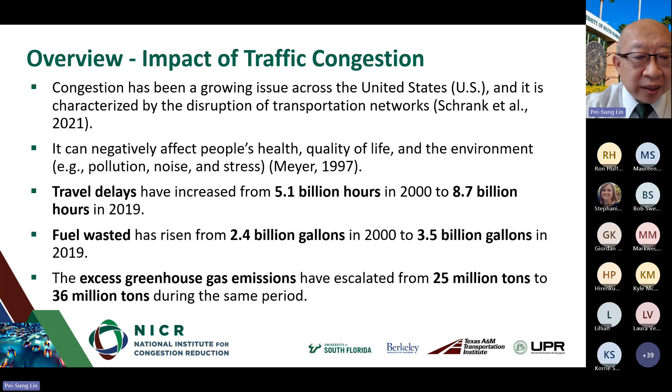And the impact in terms of the money wasted on traffic congestion, as you can see, from year 2000 to 2019, is really significant, from $77 billion to $190 billion. It not only affects individuals every day, but also affects things like trucking congestion. The truck congestion is also a very large number.

And during COVID-19, on one hand, we got the impact of COVID-19, but we saw a reduction in congestion. Everybody was wondering whether it would come back after COVID-19. But apparently, everybody experienced it again after COVID-19, and it bounced back. I think at this point, it's almost the same as before COVID, and it continues to pose a significant impact to our everyday life.

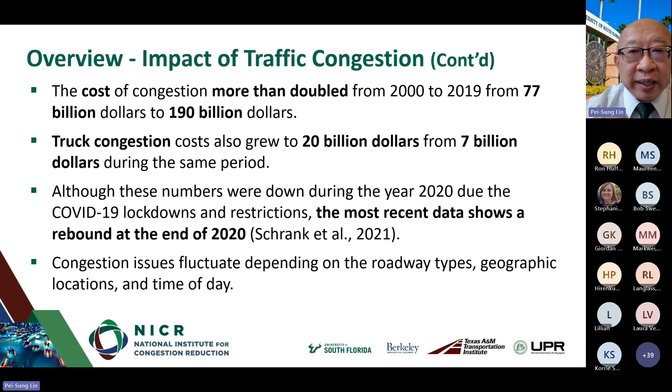If you're looking into traffic congestion, we all know there's recurring congestion and non-recurring congestion. Recurring congestion is such as a bottleneck or caused by poor signal timing, but non-recurring congestion is caused by incidents, crashes, work zones, special events, and also severe weather conditions.

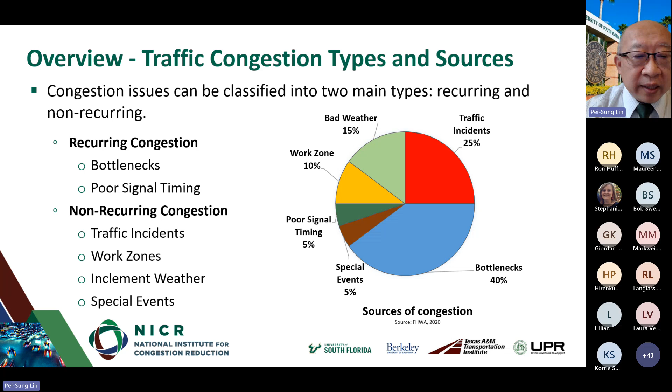So generally, how do we deal with the recurring congestion? How do we deal with the non-recurring congestion? These are always the ones we're facing, and how to address them - we're going to talk more about that later.

What's the motivation to work on this particular research project, and why a congestion reduction roadmap? In the past, when we have congestion, a lot of time we focus on how to address that, and we look into particular problems, and particular solutions, strategies, countermeasures.

But it's important that we need to be able to look at all potential causes, all potential congestion sources, and all different congestion mitigation areas and strategies. That mitigation area or strategy, I kind of refer to very similarly here - but how do we look at them together?

If you only focus on one item - but actually congestion, as we know, is a very complicated situation, and there are multiple factors that all contribute to that. So that's what motivates us to look into all these different

mitigation areas together, all these related strategies together, and also look at it time-wise from short term, mid-term to long term, and also look into different sizes of metro areas, because different metro areas experience different congestion scenarios. So it's not that one good strategy may be very good for one type of small urban city or urban area, but that doesn't mean it will work very effectively for a large urban area.

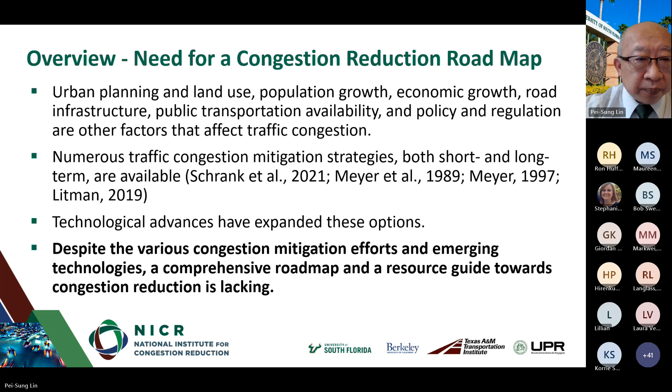So the project objective here, very importantly, is we want to understand all the causes and effective solution strategies to address congestion. And here we look into 12 major areas I'm going to show you very shortly.

We looked through the literature review into these 12 different areas. These are the areas we all think should be very effective strategy mitigation areas for congestion. So we want to look individually at all these 12 areas and also see if any areas can work together.

Literature review is one approach. Very importantly is talking to practitioners, the experts in these areas. So we also took this opportunity to talk to experts in each of these 12 areas to see what their experience is, what the challenges are, what the solutions and strategies are, and how other areas can work together with this particular emphasis area.

And to see how we can put them together to address traffic congestion. So eventually, based on this finding, we want to develop a comprehensive roadmap to help reduce traffic congestion and provide the state DOT, local DOT, MPO with a vision and steps toward how to utilize this information and resources to reduce traffic congestion.

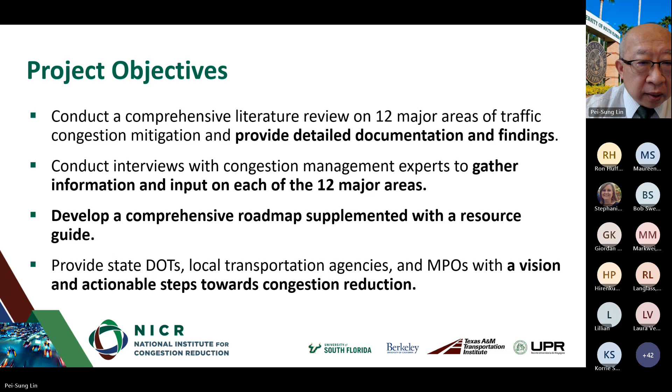We also add on generally the construction aspect - a lot of the time we know road construction is expensive, but at certain times it's also very necessary. And the other one, the last one here, so 12 plus 2 - one is construction, and the other is land use policy, because during the interviews there were a couple of experts who also particularly emphasized land use, because that definitely will also affect things beyond just the traditional way to address congestion.

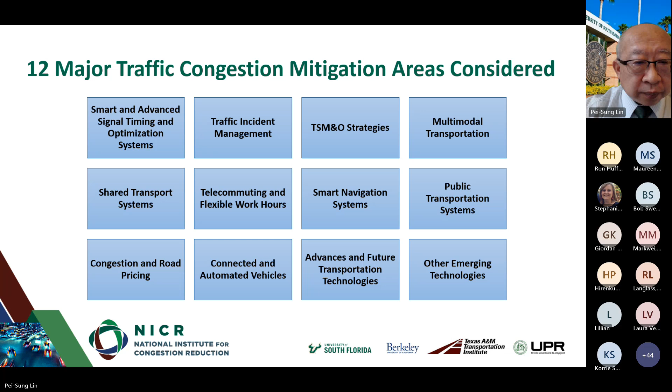So I will briefly go through these, and most of you, when you see this strategy or mitigation area, you'll understand what that means. Later on I'll also share the takeaway from the literature review and expert interviews. The first one is smart and advanced signal timing and optimization systems. A lot of you have been working in this area for quite some time, and we all recognize the importance of traffic signal timing, traffic signal systems, or even adaptive traffic signal control. So this is one mitigation area or strategy we focus on.

The second one is traffic incident management. With non-recurrent congestion, especially crashes involving a vehicle or vulnerable road users, that can cause really serious congestion. Traffic incident management is about how to effectively manage traffic incidents when they occur, and that also could include special events, work zones, or weather conditions. So this is a broad coverage on how to effectively manage incidents.

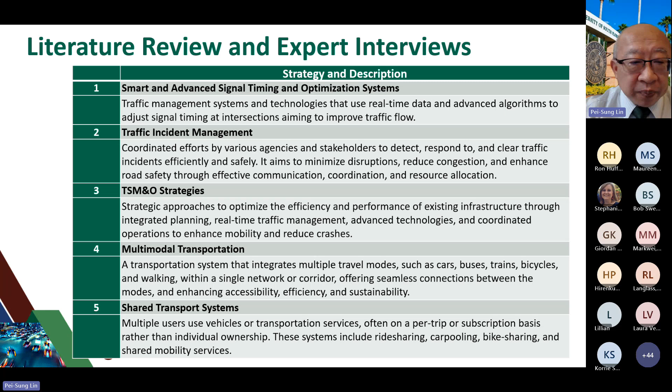The next one is telecommuting and flexible work hours. During COVID-19, most of us probably experienced working at home most of the time, and a lot of trips were reduced on the roadway. We clearly saw the difference in demand on the road. So this is another important area of traffic demand management.

The next one is a smart navigation system. Most of us have experience using navigation in our vehicles, and sometimes even before you start your trip, you look at the congestion map to see where the congestion is and how you can better plan your trip to reach your destination. So this is another area we also look into.

Number 8 here is the public transportation system, which is very important, especially if your city is large. Imagine those vehicles taking the subway, light rail, or buses - imagine if they all drove their cars on the road instead, that would make a very big difference. So public transportation is a very important area we also cover.

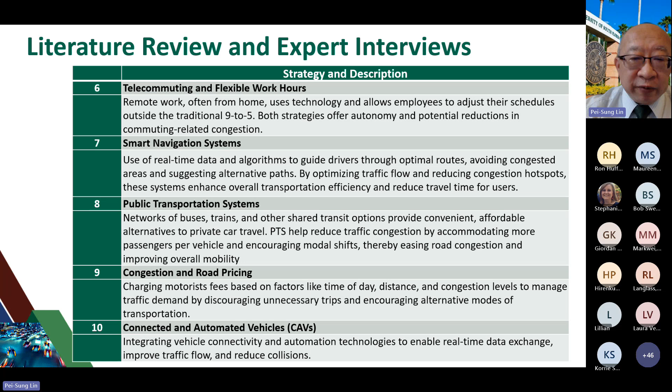And this is also one area we focus on: connected and automated vehicles. We know there's a lot of research in this area, and it can really make a big difference. But at this time, because market penetration is relatively very low right now, we don't see immediate benefit. But this is coming. The age of autonomous vehicles and connected vehicles is coming, so they will make a big difference in the future.

And the next one is advanced and future transportation technologies, like CAV and eVTOL, the electric vertical takeoff and landing vehicles, and hyperloop. There's a lot of flying car technology. So there's a lot of future technology, but some of them already have a really good foundation to move forward. This is also one area, especially on technology and future innovation, that we look into.

And there's other emerging technology. We talk about advanced and emerging, and a lot of times it's kind of close - some of it's advanced, but you can also treat it as emerging. I know the eVTOL has gotten a lot of popularity lately, so we also cover that.

And the last two are what I just mentioned: new roadway construction and capacity expansion. This one is particularly necessary, and definitely one of the congestion reduction strategies. And finally, we also have land use and innovative transportation policy programs. During our interviews, we found this is also an important topic to look into, so we included it here.

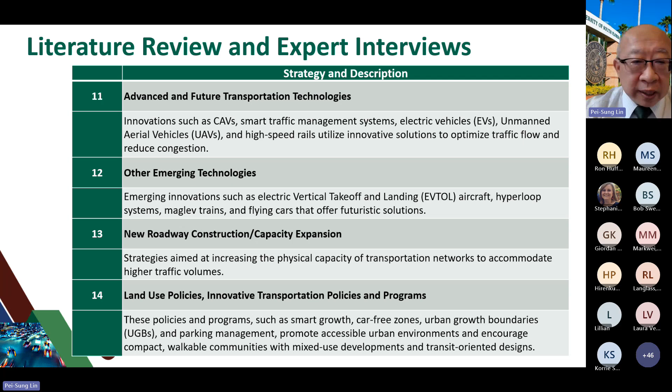So in our literature review and expert interviews, there are 12 key areas we look into. For each congestion mitigation area, on the bullet points, we look at the definition, the particular mitigation strategy or area and its sub-areas, the congestion reduction strategy, under what conditions it can make a big difference, and what approach to take. We also look into current and future technology, benefits, limitations, and uncertainty on particular strategies, and the interaction between mitigation areas - how these 12 or 14 areas can interact together to maybe integrate or combine to address traffic congestion.

We did similar work during our interviews, talking to 39 experts nationwide, covering these 12 congestion mitigation areas. We coordinated with them, scheduled meetings, and discussed topics, which allowed us to answer different questions besides the ones I just listed.

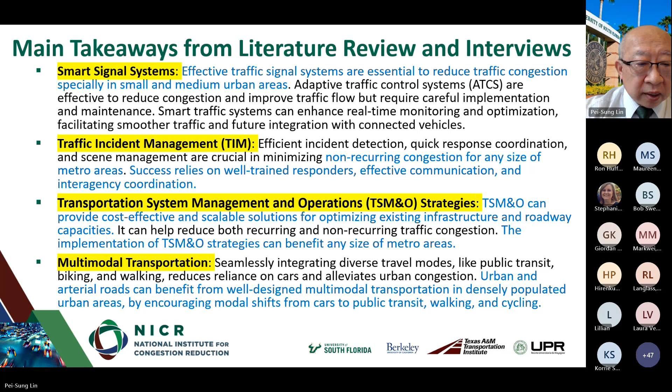And the shared transportation system, this is also another area. Somebody says maybe one day most people will all use the shared transportation system. So we'll wait and see, because especially the young generation, some people in large urban areas, don't even have vehicles. And also in large cities, a lot of times parking is expensive, and it's inconvenient to drive in the congested area. So shared transportation becomes more and more popular.

And the next one is telecommuting and flexible work hours. This is really an area we already saw during COVID-19. And I know after COVID-19, a lot of the working environment has changed. If an employer can provide flexible work hours or telecommuting, or mix them, it should make a big difference on the demand on the road.

And the next one, the smart navigation system. We know real-time information really can make differences. So an effective way is to have more people use a navigation system and also plan their trip ahead of time, and that can also make differences.

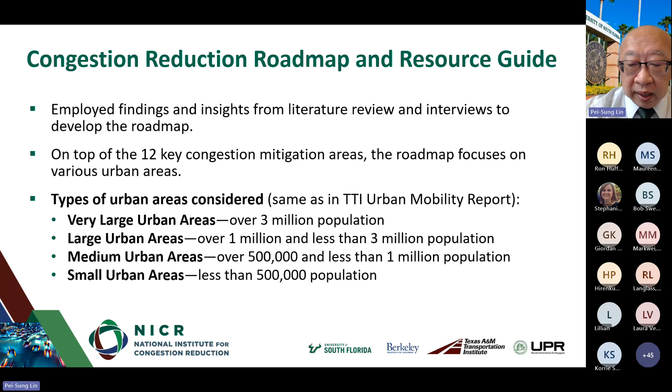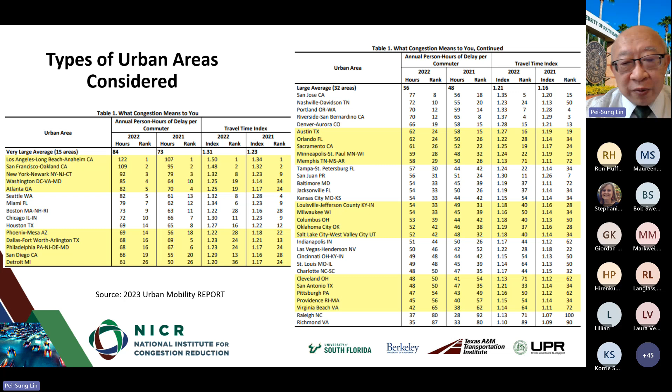And as you can see here, this is the type of urban area, and I use the 2023 Urban Mobility Report. So you may be able to see your cities in these different areas, so you can recognize whether your city is very large, large, medium or small. Yeah, so this covers a lot of metropolitan areas in the United States.

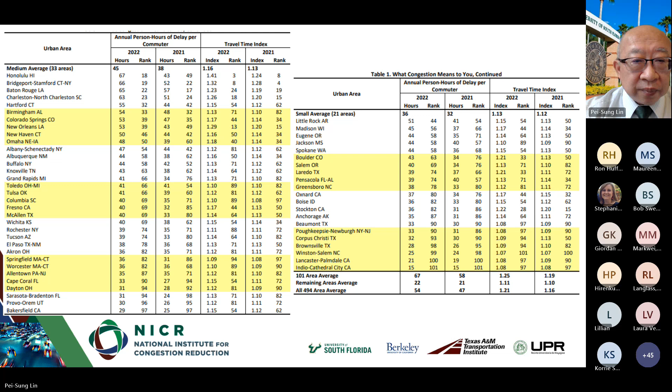And so for the congestion roadmap, here I just briefly lay out the characteristics of the very large urban area, large urban areas, medium size and small size. And as we live in these areas, you can tell the differences. The very large one here is very densely populated,

hosting all the major economic centers, culture hubs, with a diverse community and industry, and also a comprehensive infrastructure, and there are a lot of examples, the ones we show in the major metropolitan areas. So imagine those cities, you have a good idea about that.

And they likely have a really good metro or subway or light rail combination and transit buses. They have major airports, seaports, and rail terminals with a lot of combinations. And so this is one example here.

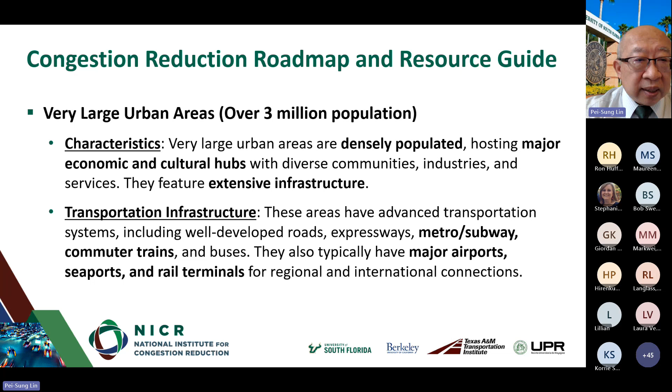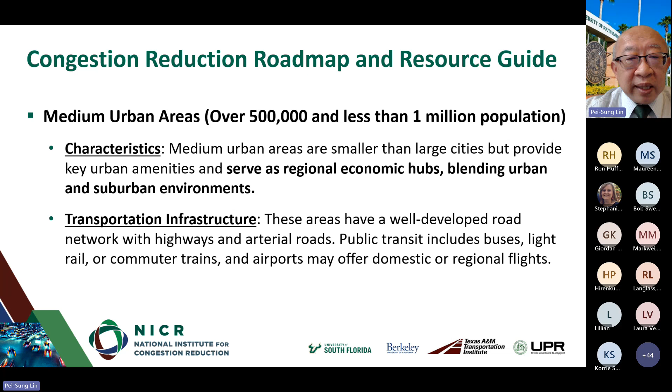And the same, we have the large metropolitan area, over a million but less than 3 million population. And the medium-sized urban area, over 500,000 population but less than a million. And the smaller one is less than 500,000. So here we listed the 12 congestion mitigation strategies.

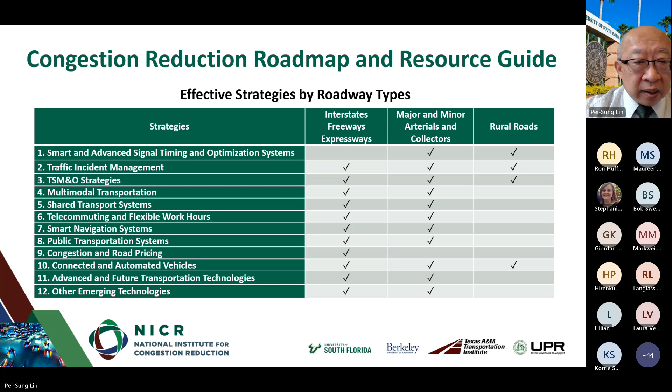So if your agency is in a very large metropolitan area, this could be an area you can focus more on, because when more people are able to use public transportation in different modes, train, transit buses, light rail, subway, anything, you start to remove a lot of traffic from the road. And that still can make big differences.

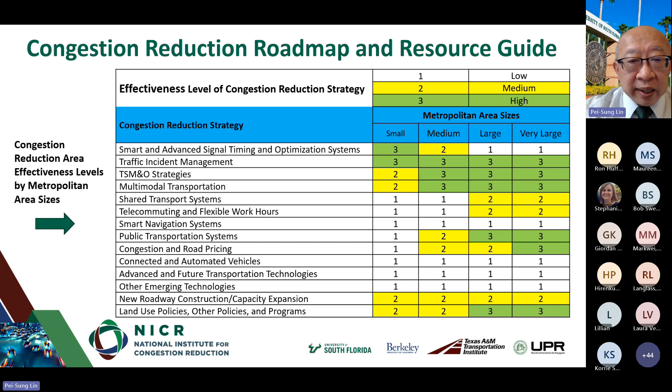And so back here, some of you may say, oh, there's a lot of others with one, like a lot of CAV technology, and the reason is because right now some of them you cannot see immediately. Some of the technology will be here, or you have already seen a very small portion on the market. But at this moment, we cannot really see the reduction of traffic congestion right away. So here we put one. However, let's go to the next slide.

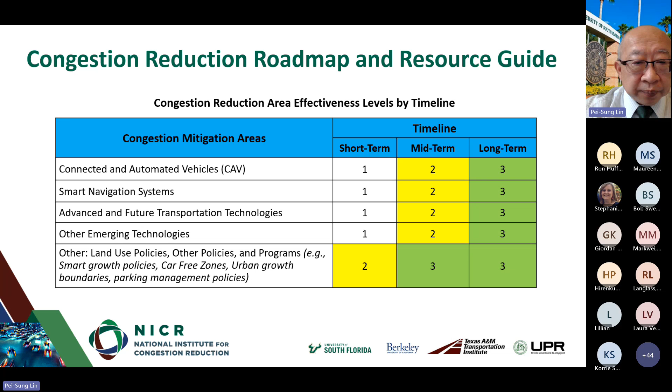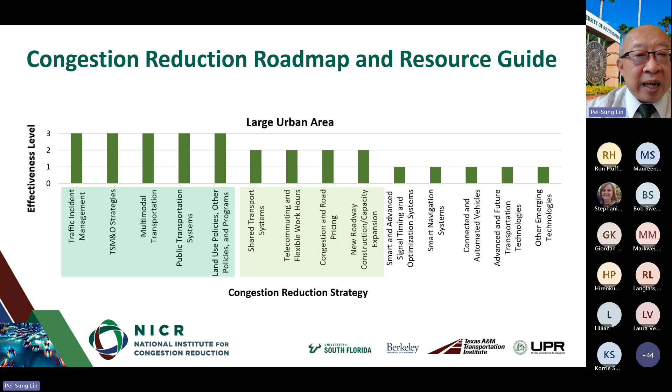But you just don't see a big reduction because there's a lot of traffic out there, and a lot of roadways already exceed the capacity. So in that way, you may not be able to see a big difference, for example, on the signal timing system.

And so for the very large metropolitan area, you can see this is the list of the important strategies besides what we just said. So the TSMO strategy applies to everybody, traffic incident management, multimodal transportation, public transportation system, and sometimes congestion pricing is really necessary, and also land use, better design, better planning for the city. This is all very, very important.

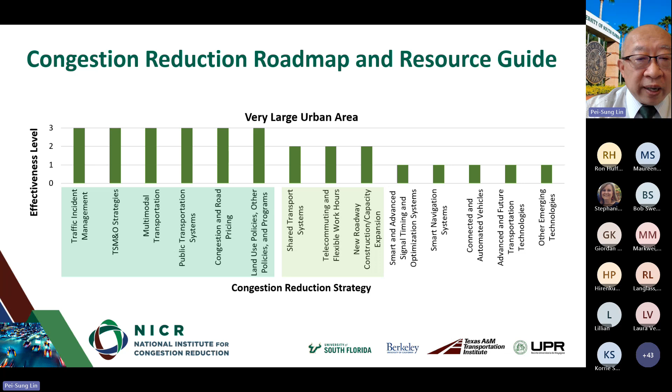And so here we also have a congestion reduction roadmap, which basically shows you the relationship: when you work on one strategy or one mitigation area, how you can work with others as well. For example, when you have a public transportation system, you should think about multimodal transportation. How about shared transportation? To be successful, these all need to work together.

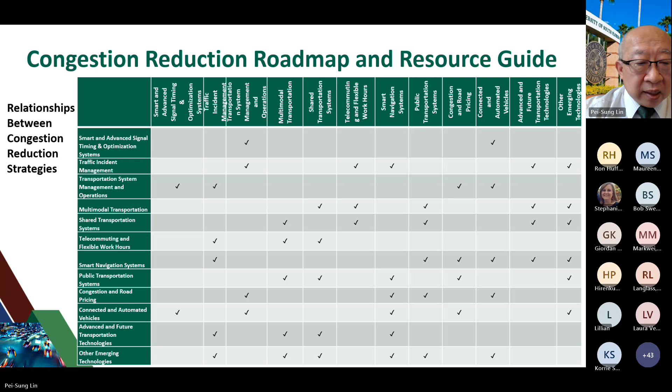And so the key steps for doing that, and I think this is the purpose of the study here: first, you identify the challenge. I know you're all familiar with the congestion problem generally in your city, and what's the solution. But when you look into a solution, here we try to show you different strategies that can potentially mitigate your congestion problem based on your urban size.

So look into not just one strategy, but multiple strategies, and also think about what's the most effective, what's of medium effectiveness, and think about which ones can apply to your city and work together. And the second one is

leverage the best practice. In the next couple of slides, I will show you some examples, some successes, because this study also goes into the success cases. We also have the list there, so that's a resource for you. When you look at the picture together, not just one particular area, but all these 12, 14 areas, then look into similar-size cities and see what successful examples are out there. Maybe some of them can apply to you.

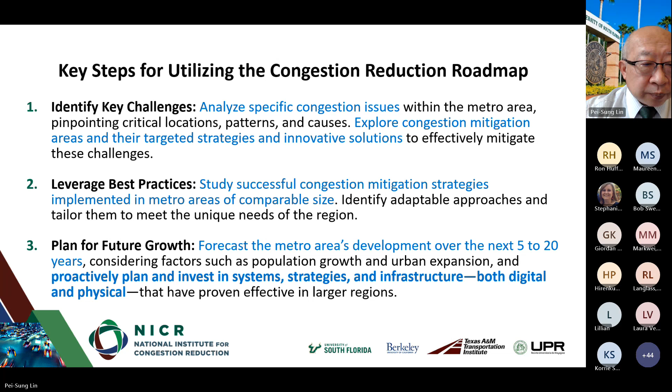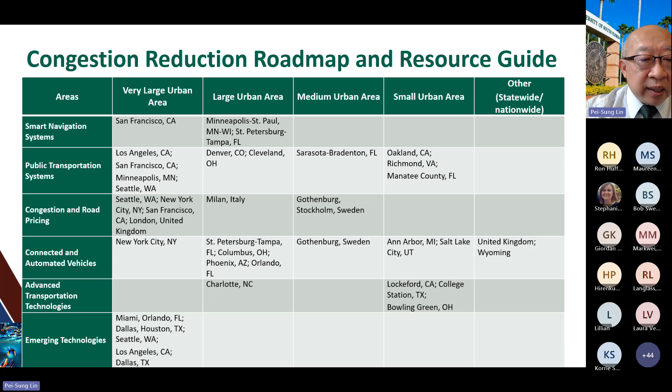Yeah, so here we show you a list of successful implementation examples, from very large, medium, and small areas. We've got all the examples there, and if you look at our report, you can see individual descriptions of all of those. And here we also provide the list of lessons learned. So what can we do for these different areas? This is also very useful to you.

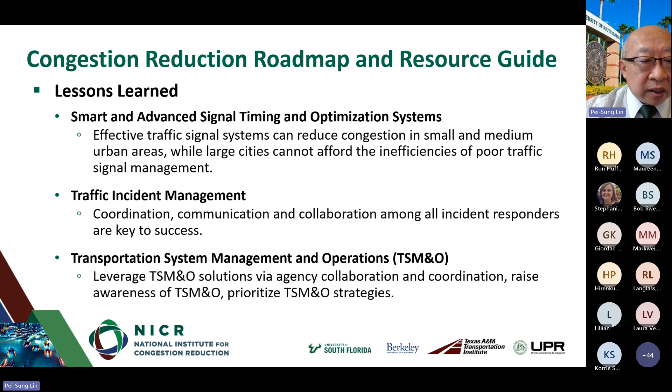You know, we only have 12 minutes left.

So I'm going to have you quickly look at this, and how can we promote that? We listened and learned from the interviews, from our experts, so we can not only look into the successes, the examples, the case studies, but also the lessons learned. That will allow you to know what to focus on more, and you don't need to repeat some hard times people experienced before. You learn from that, so you don't need to experience it.

And so here we got a resource guide. We got all the examples and different strategies we talked about. We'll provide all the links and the information, so you can look into that based on different congestion mitigation areas. So we provide you all different examples as a resource, and you can use that.

And so the conclusion here is that traffic congestion really causes significant traffic delay, and also a high likelihood of secondary crashes, loss of productivity, and it also affects our public health and quality of life. So it has a really significant impact on our everyday life.